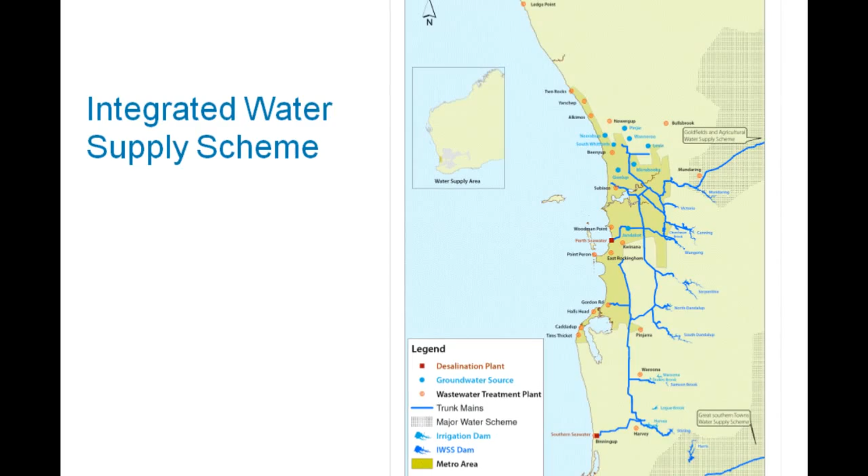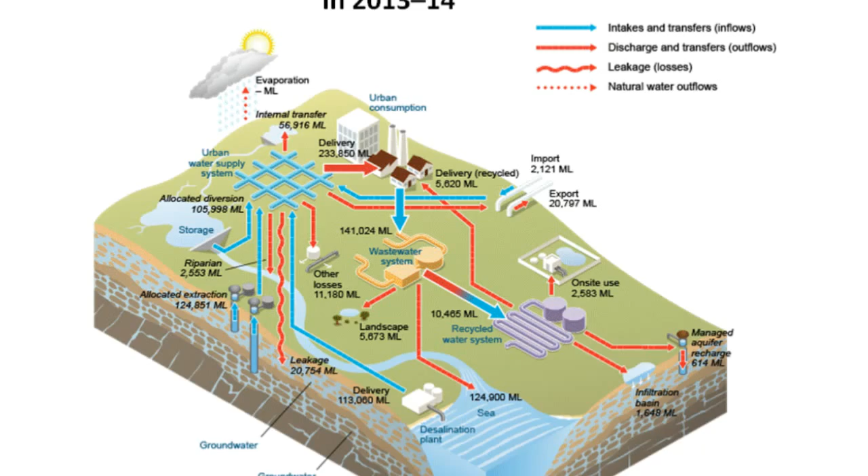In this video, we will discuss water issues and wastewater recycling issues in the Western Australian context. I will focus only on the Perth metropolitan region, since more than 90% of the Western Australian population resides in Perth. Mainly, I will cover the water system in the Perth metropolitan region, the wastewater system, how water recycling can be done, why water recycling is important, and what are the benefits and implications of water recycling.

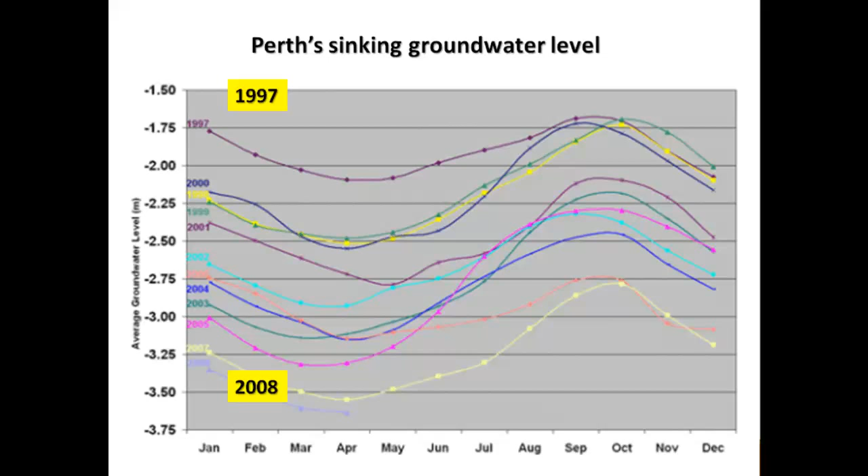As we have already discussed, over the last 3 decades, water availability in the Perth metropolitan region has significantly declined. According to the Water Resource Inventory 2014 published by the Department of Water Western Australia, the decline in water availability is mainly because of drying climate, rapid urbanization, and excessive groundwater depletion. This was also reflected in limiting groundwater availability for urban irrigation.

On the other hand, Perth's population has almost doubled in the last 3 decades. According to the prediction made by the Australian Bureau of Statistics, Perth will have over 3 million people by 2030. These two situations ultimately result in a significant water deficit in the Perth region sooner or later, which needs to be addressed with innovative alternatives.

According to Water Forever 2009 published by Water Corporation and the State Water Plan 2007 published by the Government of Western Australia, water recycling, groundwater recharge, and stormwater management are some important strategies that can help reduce the water deficit in coming days. Moreover, the demand for recycled water is likely to increase as the climate continues to dry and the value and amount of parks and gardens increase significantly across the Perth metropolitan region.

Wastewater recycling has been incorporated into a number of strategic reports, namely State Water Plan 2007, Water Forever 2009, Better Urban Water Management 2008, Liveable Neighbourhoods 2009, and Directions 2031 2013. Water Forever 2009 aims to recycle 60% of wastewater by 2060, with an intermediary target of 30% by 2030.

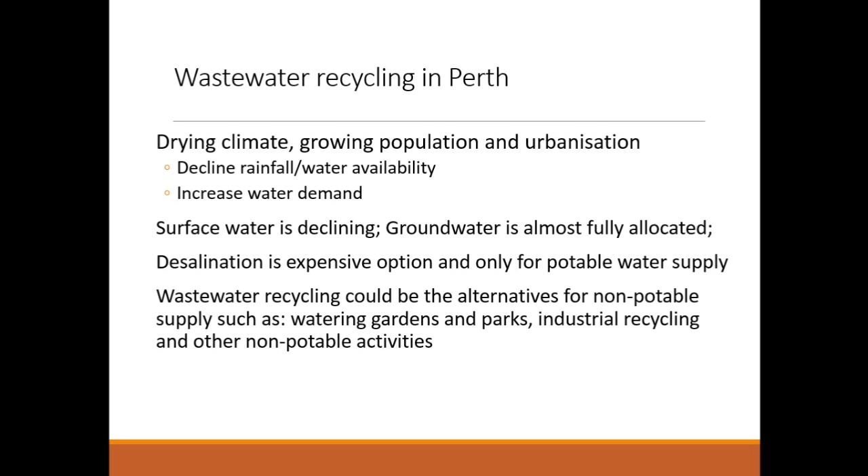Water recycling got its place in planning and strategic documents. Now it's time to implement the wastewater recycling strategy across the Perth region and utilize the recycled water for appropriate and fit-for-purpose activities. Let's explore a bit more on each of these opportunities for recycled water.

Green infrastructure basically is the green spaces with vegetation and trees, such as gardens, parks, verges, median strips, ovals, playgrounds, golf courses, or any other urban forests. Why do we need green infrastructure? Because growing urbanization needs more green spaces, vegetation, and trees for creating a cool and green environment and promoting community health and urban liveability. A further addition of 1 million people by 2030 in Perth requires an additional 4,500 hectares of green infrastructure.

In addition, local councils, environmental groups, and community leaders are attempting to increase the tree canopy and green spaces across the Perth metropolitan region to develop green communities. Trees, gardens, and other green infrastructure need water to establish, maintain, and grow. These activities get water from local groundwater. Since groundwater is almost fully allocated in most parts, there is no additional groundwater available for that green infrastructure in future.

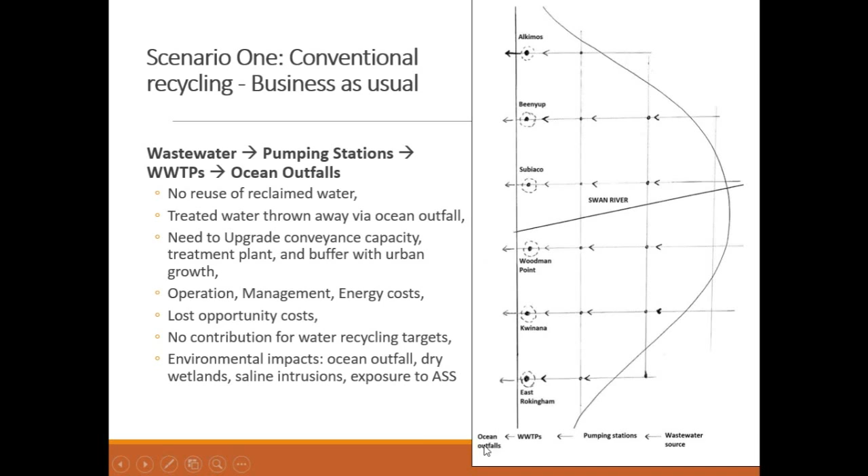This diagram represents Perth metropolitan region. There are wastewater treatment plants along the coastal line and several wastewater pumping stations pumping wastewater down to the treatment plants. In this scenario, there will be no reuse of recycled water. Wastewater from the source comes down to the pumping station, then those pumping stations pump wastewater down to the treatment plants, and those treatment plants treat wastewater up to a certain standard and then throw it out to the ocean via ocean outfalls.

Let's talk about the groundwater replenishment scenario. In this scenario, wastewater from the source is pumped to the treatment plants, which are located in the coastal region, where wastewater is treated. After treating wastewater, treated wastewater is injected into deep aquifer, which is known as groundwater replenishment.

The second scenario is structurally similar to the first one. The wastewater comes to the pumping station and the station pumps it to the wastewater treatment plant. The wastewater treatment plants become resource recovery centers where the wastewater is treated up to drinking quality standard and then injected into deep aquifer or various layers of aquifer via injection bores for future scheme water supply. Almost 80% of water can be recovered at wastewater treatment plants, and the remaining should be disposed into the ocean via ocean outfall.

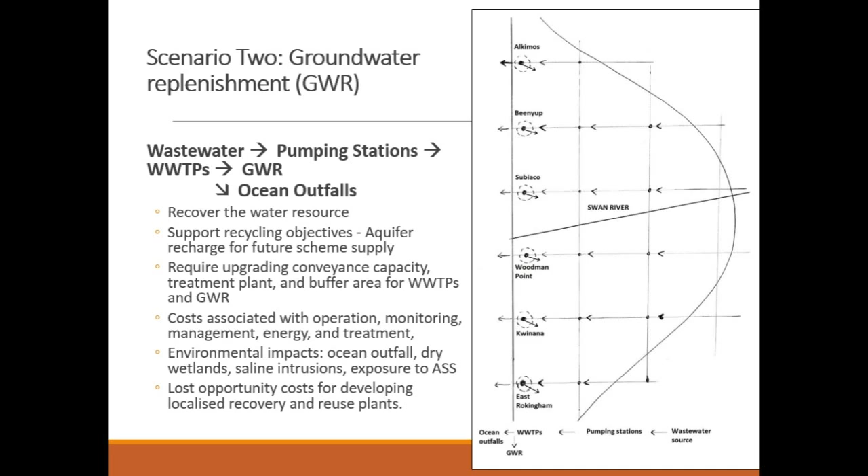Scenario 3 is the localized recovery and reuse scenario, which is a new paradigm where the local pumping station becomes a wastewater resource recovery and reuse plant. These local pumping stations not only collect but also recover and recycle wastewater for various local land use activities. As a result, the local community will become a water sufficient community that imports less scheme water and exports less wastewater.

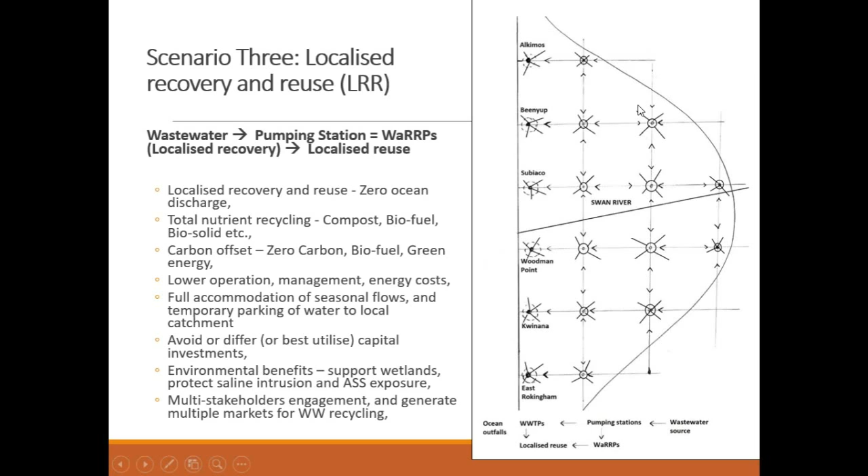Another major benefit is to cap wastewater flow to the major wastewater treatment plants so that the capital investment for upgrading the conveyance, treatment and buffer capacity of major wastewater treatment plants will be reduced. This will help to develop a sustainable wastewater system with a stable wastewater flow regime. And as I have already mentioned, it will develop water sufficient communities.

Scenario 4 is a mix of both the groundwater replenishment and localized recovery and reuse scenarios. In this scenario, the local pumping station performs dual activities. It pumps wastewater to the wastewater treatment plant where applicable, and also acts as a wastewater resource recovery plant where applicable. The wastewater treatment plants treat and recover the water resource and inject it into deep aquifer, while the local pump stations, that means wastewater resource recovery plants, recover the water resources and utilize it for local industries, agriculture, green infrastructure, and other land use activities.

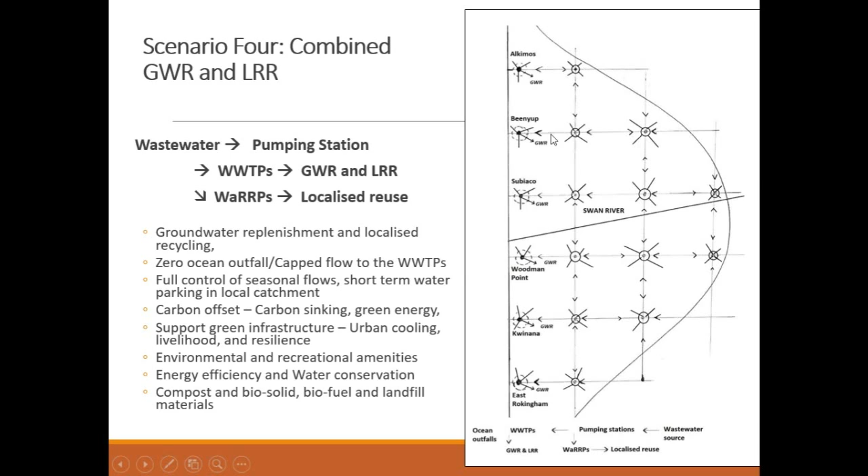This is an integrated and holistic scenario which provides benefit for all the coastal region as well as the inner part of our metropolitan region, and it supports the local community, local catchment, as well as deep aquifer. Scenario 1 is business as usual, where there was no intervention at all. Scenarios 2 and 3 present different approaches to augment the scheme water supply in future.

Scenario 2 emphasizes large-scale scheme supply via groundwater replenishment, whereas Scenario 3 prioritizes small-scale wastewater resource recovery plants to utilize recycled water locally for watering, local green infrastructures, and other beneficial land uses. Scenario 4, on the other hand, integrates Scenarios 2 and 3 to present a holistic approach to fulfill the projected gap between water demand and supply across Perth metropolitan region.

The combined scenario also helps in reducing the uncertainty about future water availability and thereby reducing the competition for water resources from different water users. When the uncertainty can be resolved with the reliable availability of recycled water resources, most of the unfair competitions and groundwater restrictions can be avoided. This will be a great strategic benefit for the water provider, government authority, as well as consumer communities.